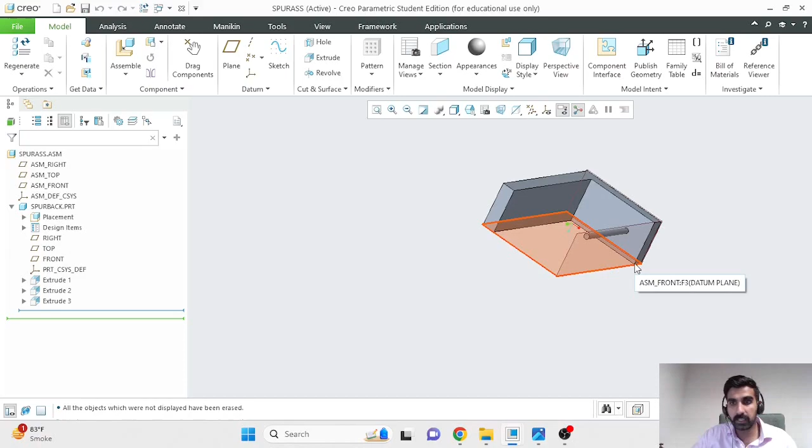This is very similar to what we've done previously for a spur gear train, but a spur gear transmits power across parallel shafts, and bevel gears can be used to transmit power across perpendicular shafts normally, even though there are specialized bevel gears that can transmit power across intersecting shafts at 45 degrees or 120 degrees, or even non-intersecting shafts. But we are focused on the standard case where we will have two bevel gears transmitting power across 90 degrees.

You are welcome to design your bevel gear yourself. You'll use standard operations whereby first you'll make a cone, because the base of a bevel gear is a cone, whereas the base of a spur gear or a helical gear is a cylinder. Make a cone, then remove material from it to make your involute profile, and once you have a tooth you can pattern it axially about the center of the gear, and you'll have your bevel gear.

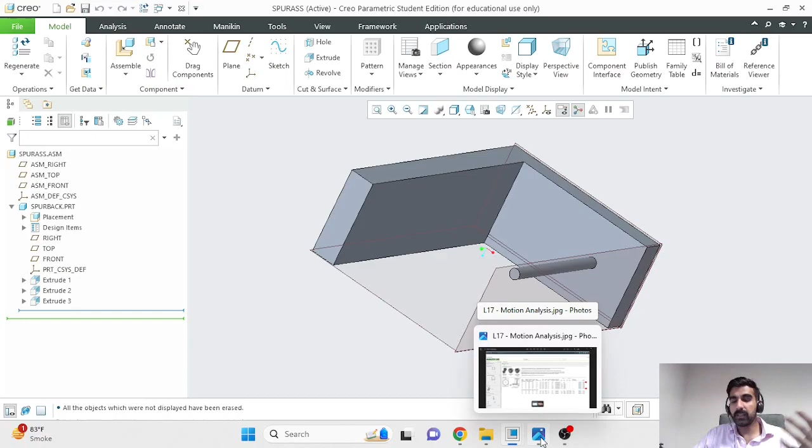But what I'll do is use standard bevel gears which have been made by manufacturers, sold on McMaster-Carr. We've talked about McMaster-Carr, it's an online hardware store, and I'm sure you can get to this page. If you can't, there's the link over here. I will be choosing this bevel gear.

From here, and I'll try to mate them together like such, and then on actuating the first gear, the second gear should move perpendicularly. A few important parameters of this gear: like with spur gears, two mating gears should have the same gear pitch and the same pressure angle.

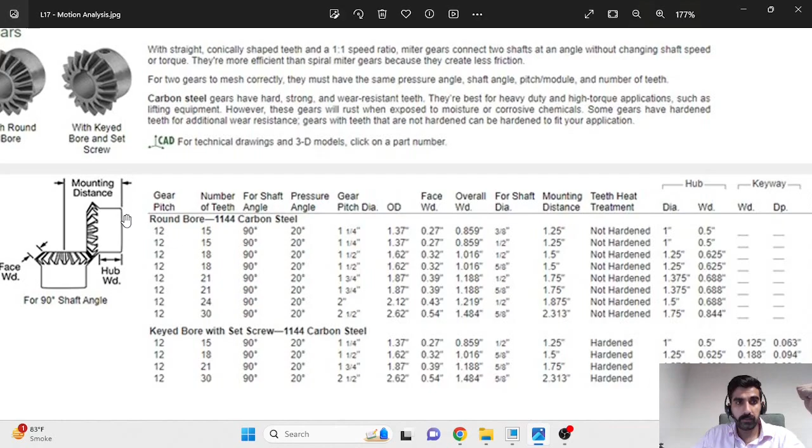In my case it doesn't really matter, because for the sake of example I'm going to use the same bevel gear twice. So all I'm doing is changing the direction of motion, not changing the speed of the outlet relative to the inlet. But if you are using gears of two different sizes, make sure the gear pitch and the pressure angle are the same. Right now they are the same because I've applied this filter over here, where only those gears with the gear pitch of 12 are being shown.

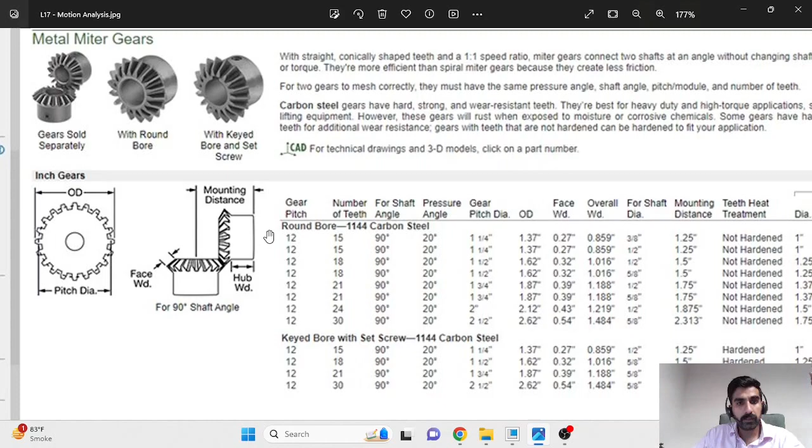And the second parameter that is of importance to us is this mounting distance. So for each bevel gear, if you draw a cone along its teeth, it will intersect at a point along its axis, and that will determine its mounting distance.

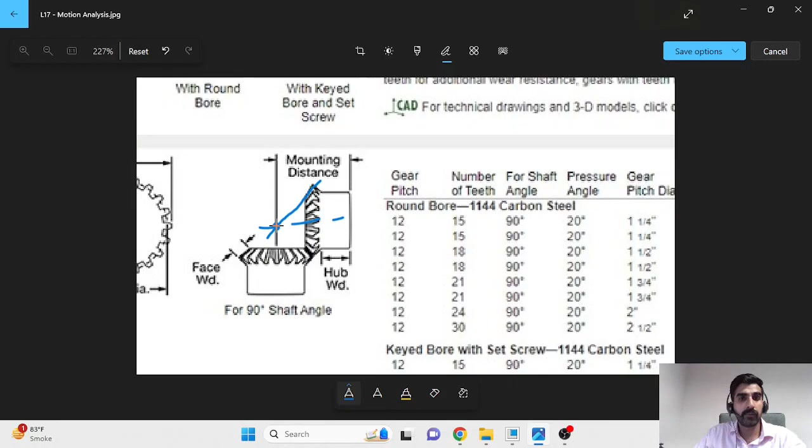I was hoping I'll be able to draw over here. This is more complicated than I thought, but might still work. If you draw a line along its tooth, through its tooth, and see where it intersects its central axis, that is the point where your two bevel gears would meet, where the respective apex angle of the bevel cones for both gears would intersect.

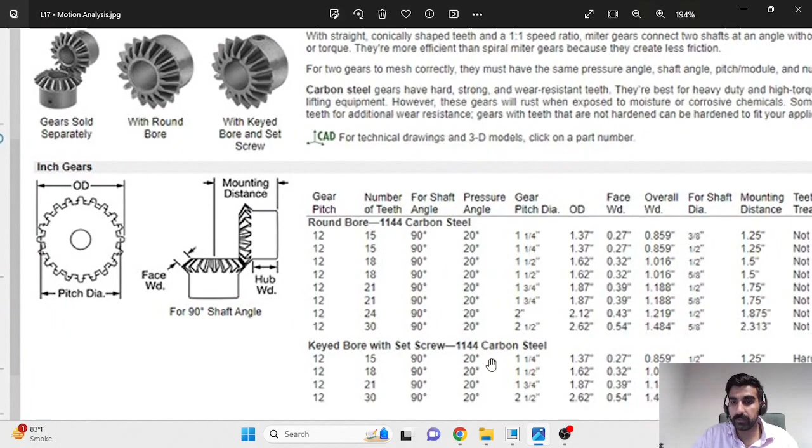But for us, this has been calculated as the mounting distance. So the mounting distance for our gear that we are using is reported over here as 1.25 inches. So that's the distance from the back of the hub, in this case, to the cone apex point, and the two bevel gears should have the same.

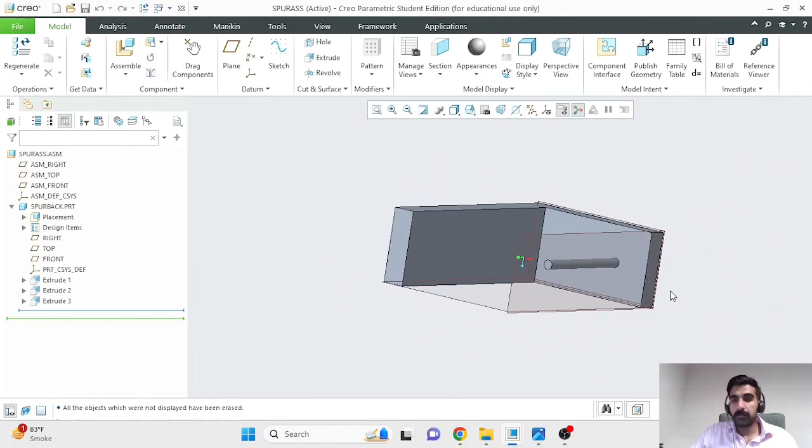They don't have to have the same mounting distance, but if the two bevel gears are identical, then they'll have the same mounting distance. So I'll use this back plate, this base assembly to mount my bevel gear.

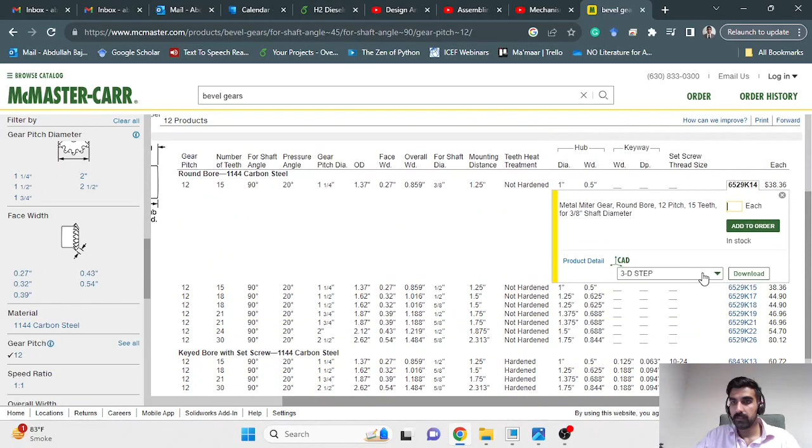So I have downloaded my bevel gears from McMaster-Carr by selecting the gear that I want. Let's say I want this gear, and then select a 3D step file. That's a 3D format. Unfortunately, Creo's part format is not available over here.

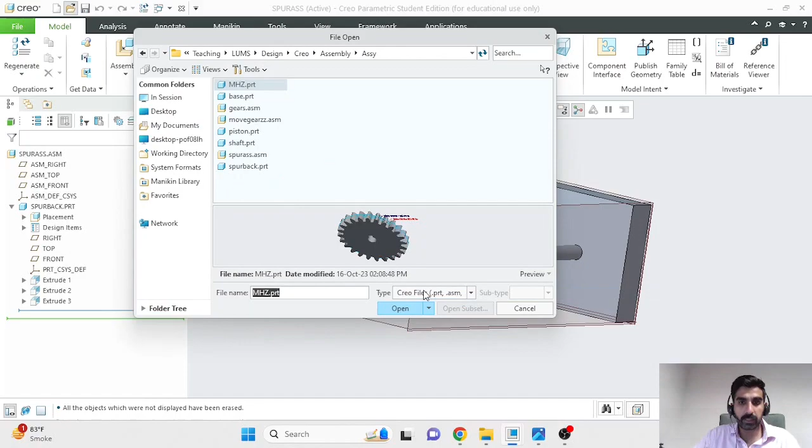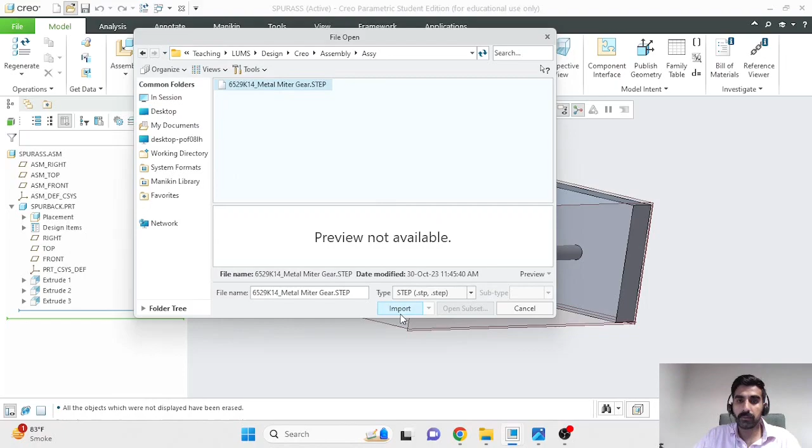Download that, and then we can import that in Creo. So I'll open a new part file, and right now the bevel gear which I've downloaded is not visible because it's a step file. You could either enable all files, or if you want to be selective, you can select step file from here if you can find it. Over here it is, and now it will only show you your step files in your working directory.

I'll import it, and this step converts the step file into a part file, into a .prt file, so that we can work on it in Creo. You can adjust these settings if you want, you can change the name. I'm happy with the default name.

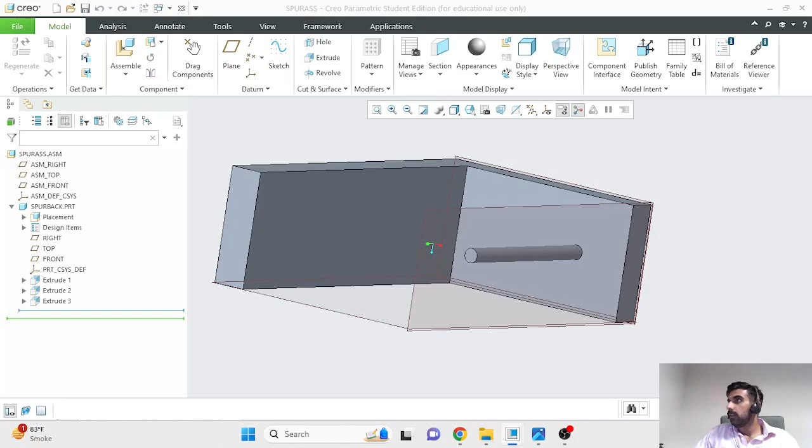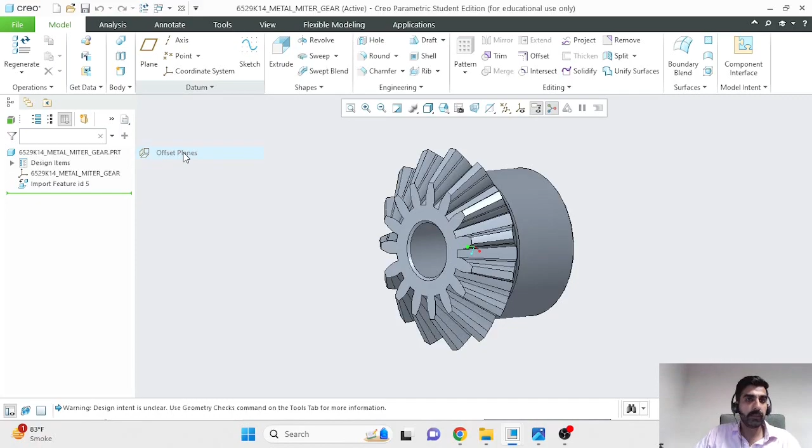And now it has been opened in Creo as a part file. You'll notice that you have a coordinate system, but you don't have datum planes, and most likely you will need them later. So a very simple way of adding principal datum planes to imported parts in Creo is by going to datum and creating offset planes, offset to the origin of the coordinate system, with x offset 0, y offset 0, z offset 0. It has created three principal planes which are mutually perpendicular and passing through the center of our gear.

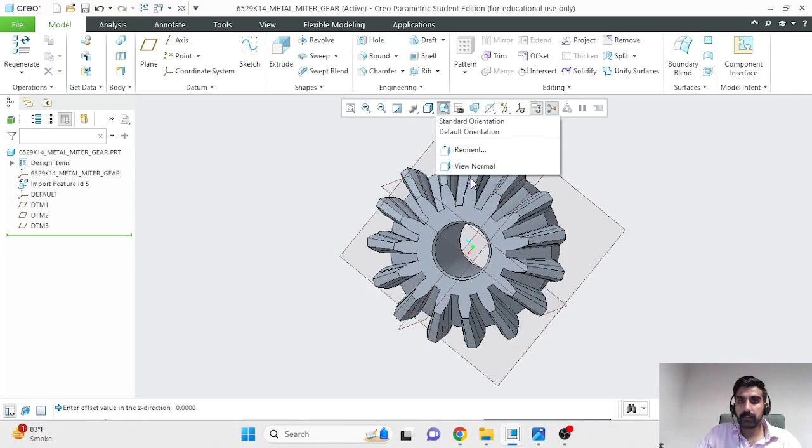We can verify that by looking at it perpendicularly.

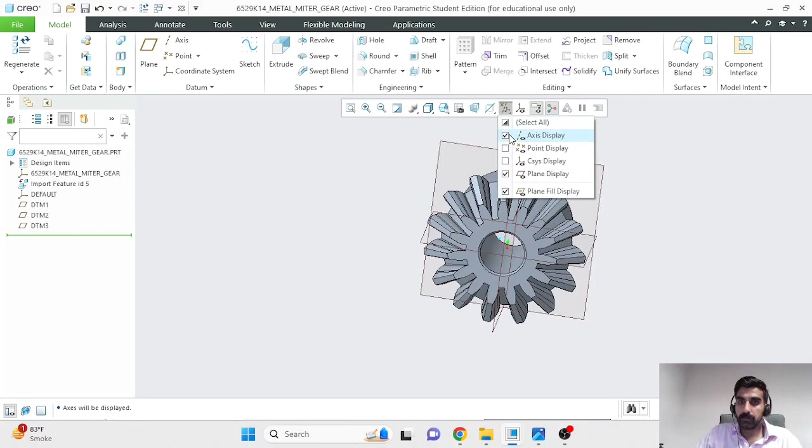Another benefit of doing this is that we can now easily create an axis through the center of this gear. Had we created a cylindrical feature in Creo, an axis would have automatically been generated, but over here we don't have an axis. The axis option is enabled, but nothing is showing up, and we will need to have an axis in order to define pin joints.

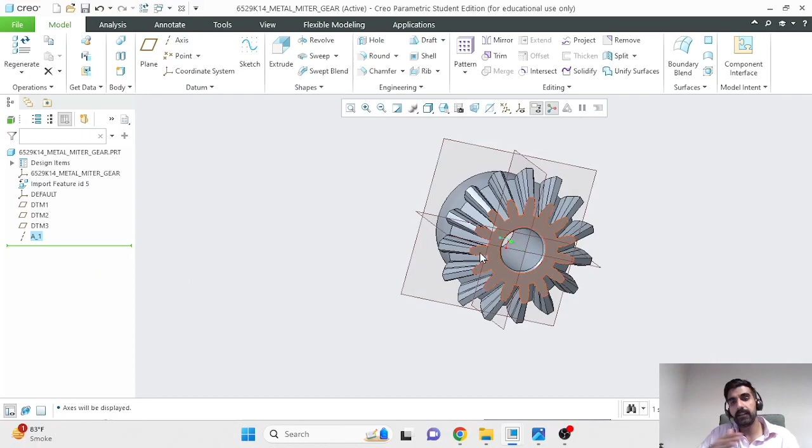So I'll define an axis by selecting two intersecting planes, and an axis would be defined along the line where these two planes are intersecting. So you see a new axis has been created, and that's over here.

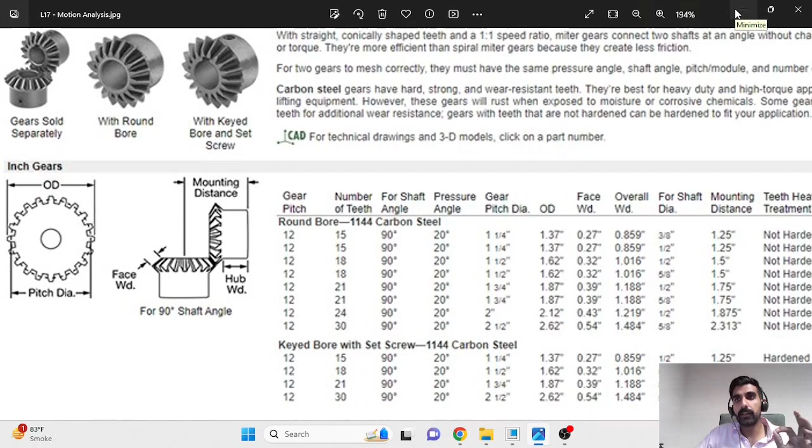Another thing that I'll do is I will define this mounting distance. I'll make a point over here so that I know where the mounting distance is, just for reference. So I'll make a sketch over here.

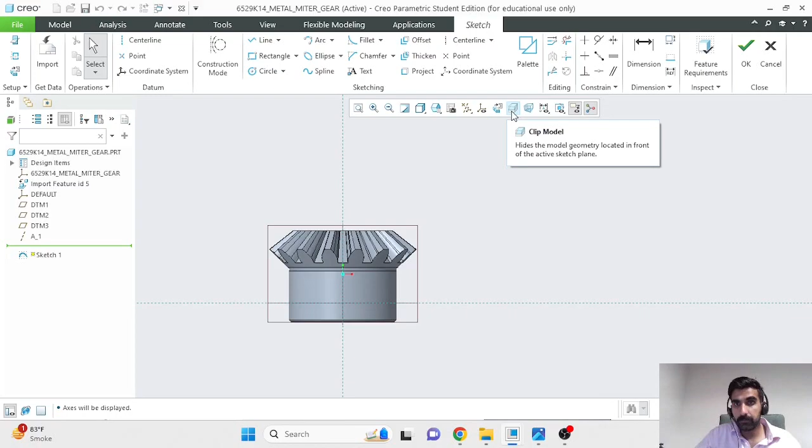I don't know if we've discussed this previously or not. If you're in the sketching view and you are working on a plane which is in between some material, you can clip the material between your eye and that plane by pressing this clip model, and it gives you a cross section in that sketching plane.

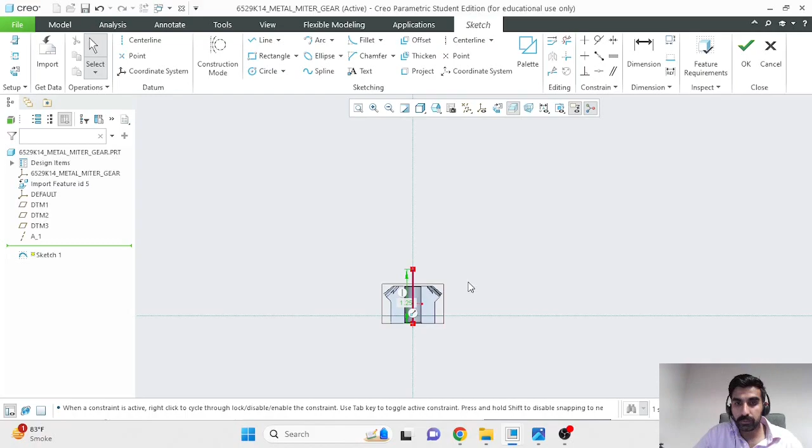What I'll do is just make a simple line starting from the back of the gear ending somewhere over here, and I know that the length of this line, if I want this to be an indicator of the mounting distance, should be 1.25 inches. I'm working in inches, so I'm consistent in terms of units.

Now what I'll do is create a point. Now I'm not in Sketch, I'm in the default model tab, and I'll create a point which is a zero-dimensional datum. Axis is a one-dimensional datum, point is a zero-dimensional datum, and planes are two-dimensional datums.

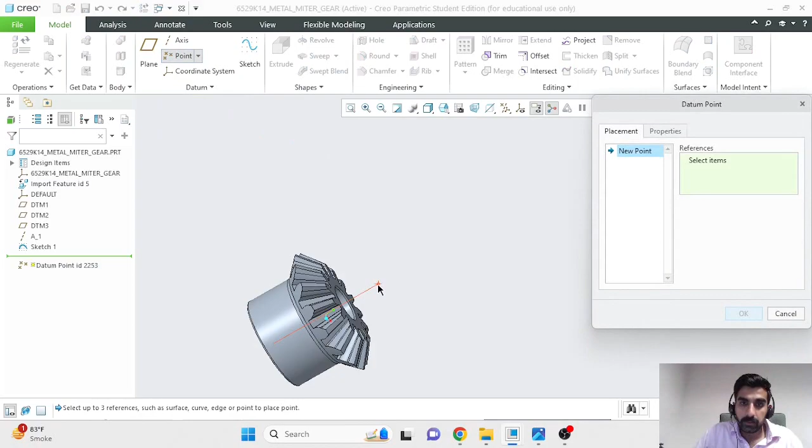So I'll select the edge of this line and create a point over here. I can actually hide the sketch now, I don't really need it, but this point would be a useful reference later. So this point is the apex, the vertex of a cone if it were to be created by extending these teeth.

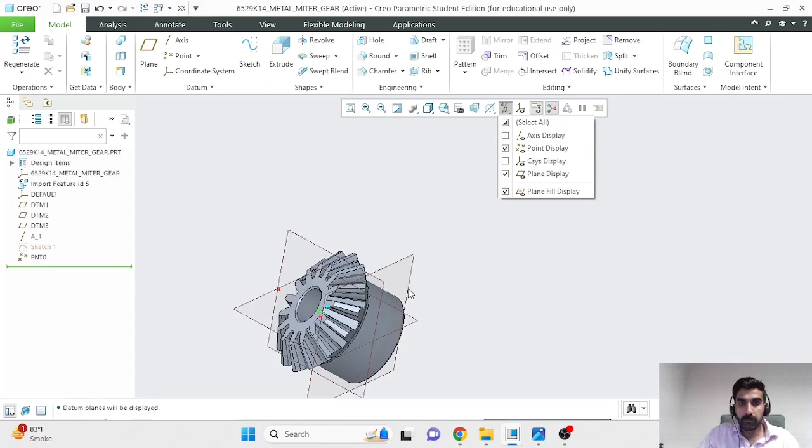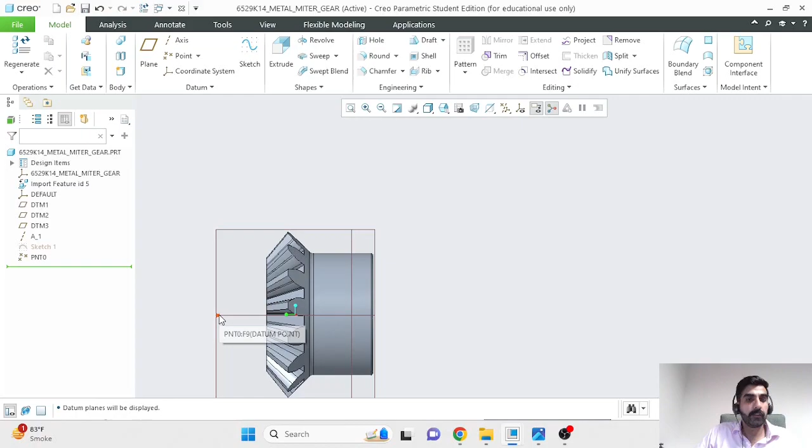So if I look at it, normally this will become obvious. If I look at things perpendicular to this axis, just imagine that you had a line extending through this tooth. Where it would intersect the axis of this gear is this point. So that's the tip of your bevel cone.

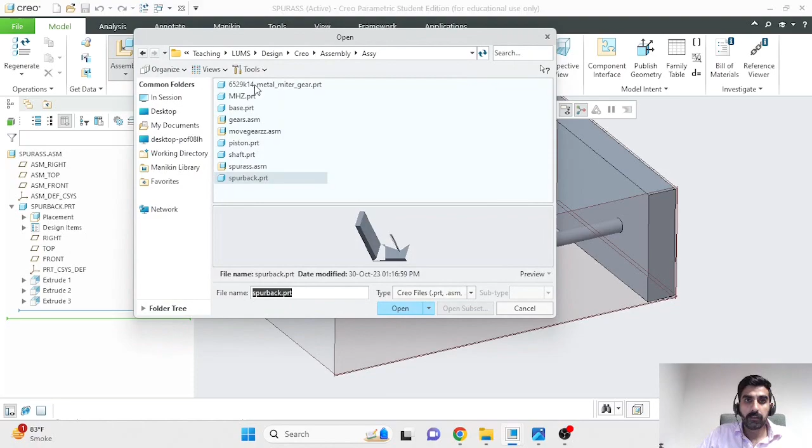I'm happy with this bevel gear, which was imported as a step file and has been modified in the part file. I'll assemble that over here. This is the bevel gear that I just imported, and I'll define a pin joint from here.

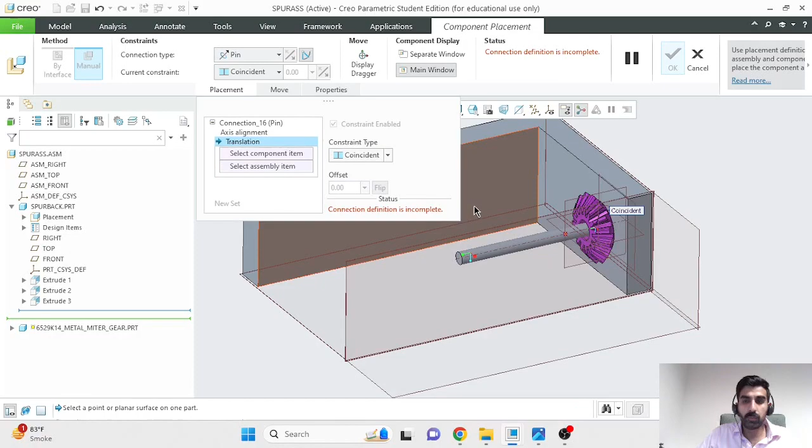Sorry. The first thing that you need to define is the axis. So select this axis and select the axis on the shaft where you want to mount it. And the second thing that you want is a translational constraint.

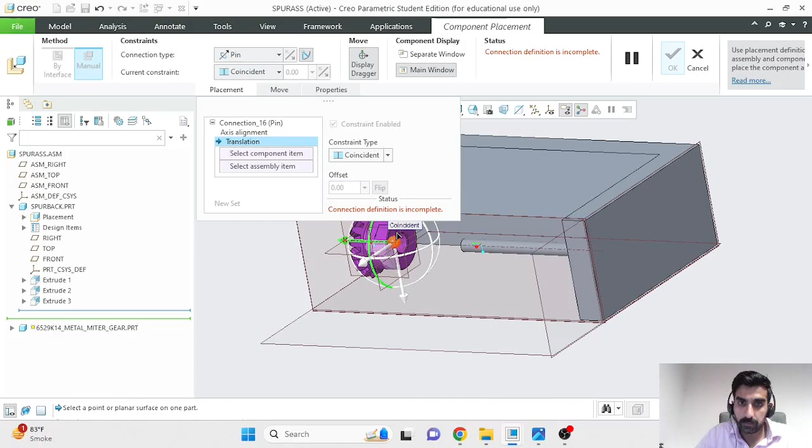So what I'll do is select this surface and this surface, and I'll make them coincident for now. It's not realistic, but for the purposes of our demonstration, that's good enough.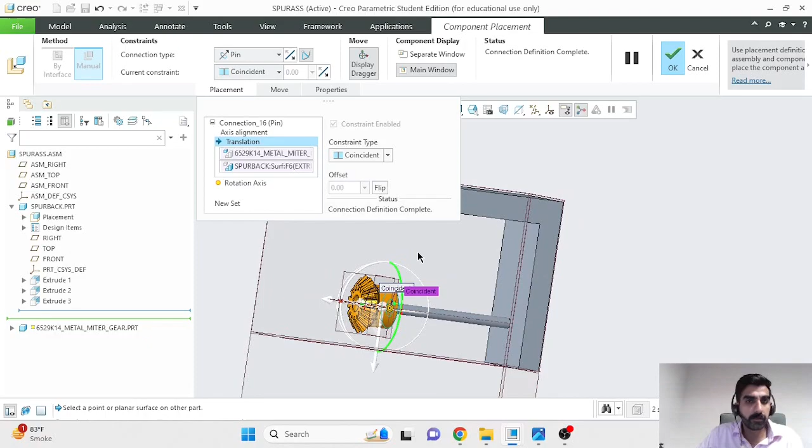So that's our first bevel gear. We can verify that it's a pin connection because it rotates and doesn't translate.

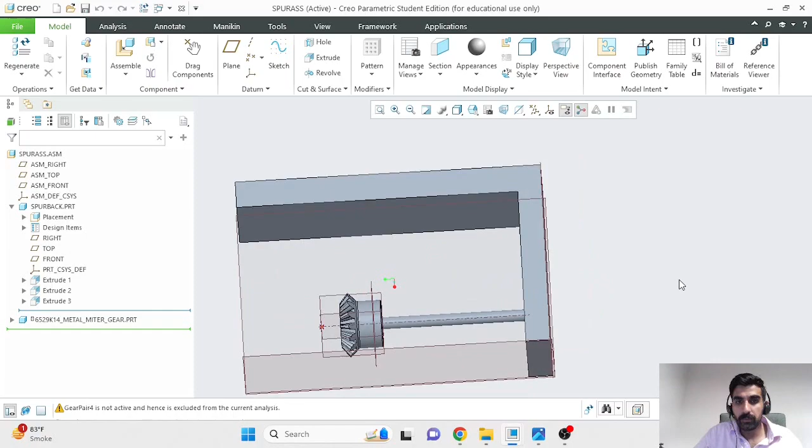Now we have to add the second bevel gear. Before we add it, we need an axis, a shaft on which to mount it. Let's think about where the shaft would be. The first thing we know is that the shaft has to be on the same plane as this first shaft.

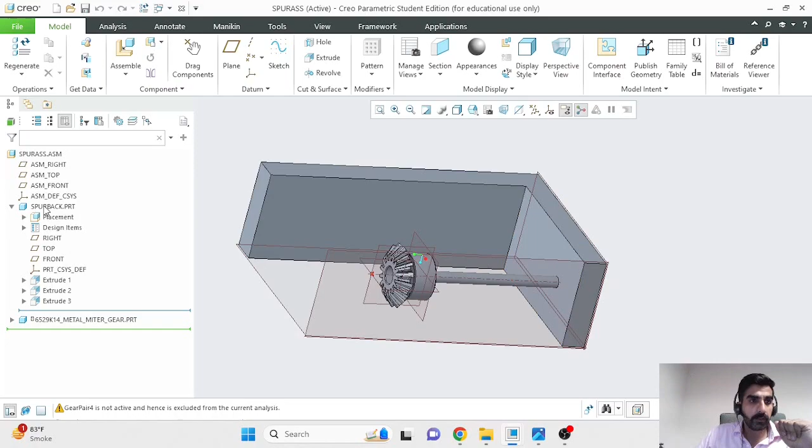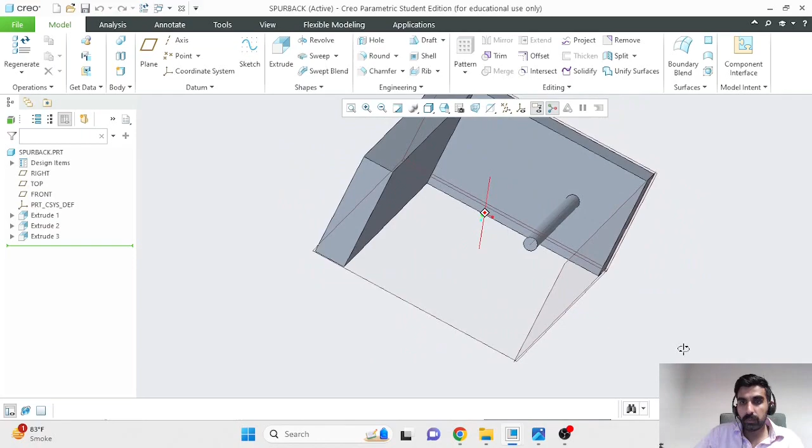So for that, let's create a new plane. You can either work on your base part within this assembly by activating it, or what I prefer, to keep things less crowded, is to open that file in its own window and work on it there. What I want is a plane parallel to this plane and intersecting this axis.

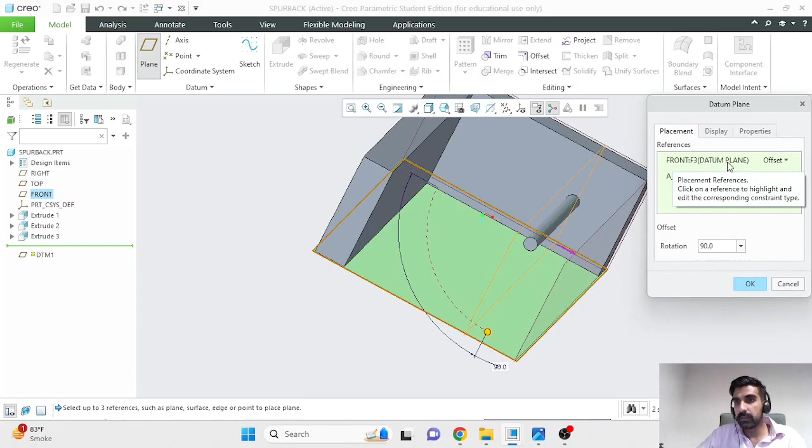I selected these two things while holding control, and I'll make a new plane by pressing the plane button, and I'll have to prescribe a few things. I want the new plane to not be at an offset from the reference plane, I want it parallel to the reference plane. The second reference I provided was the axis, and I want the new plane to pass through it. So that's good. After fixing these two properties, I click OK, and this new plane has been created.

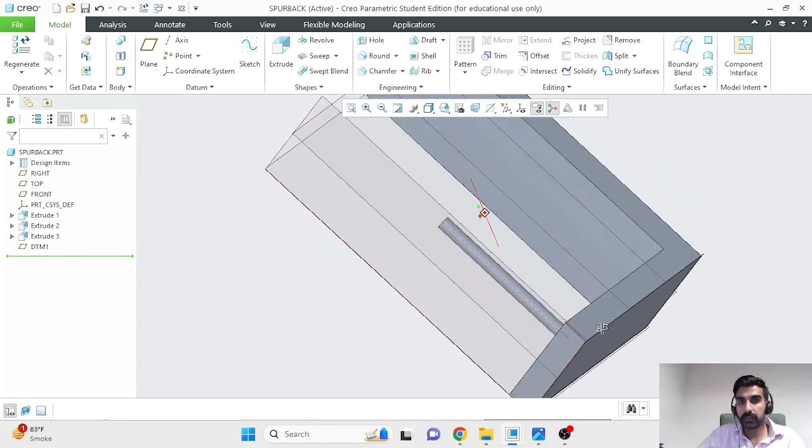As we've discussed previously, you can modify how big or small you want this icon, this representation of your plane, to be. This is more intuitive for me, because if I look at this plane, I'll know right away it's one I made in reference to this shaft.

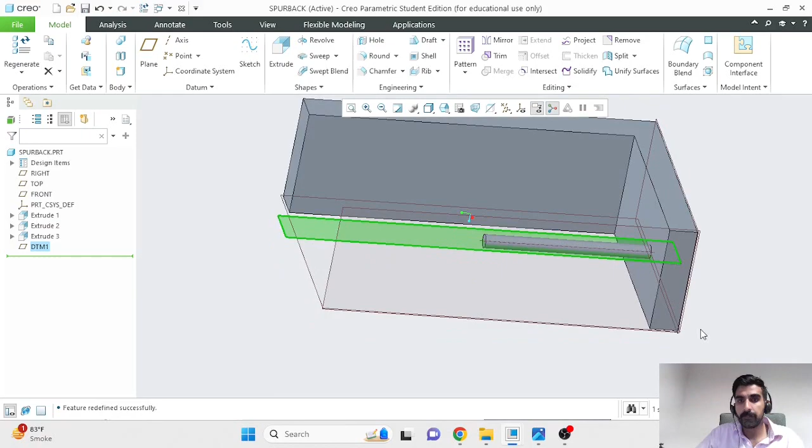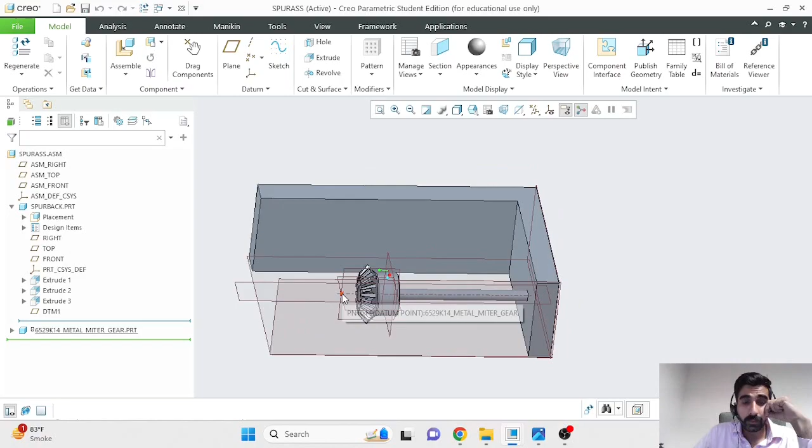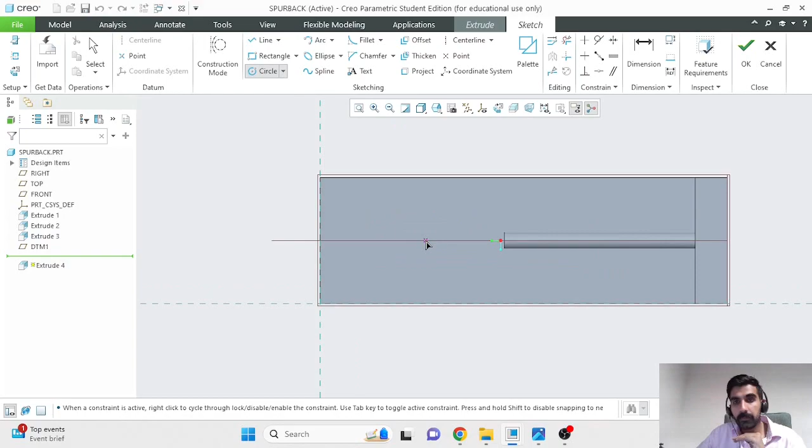So now going back to our assembly, we have this plane. The next shaft I create has to be in this plane, and it has to pass through this point. Let's go back to our base part and make a shaft here by performing an extrude operation. That shaft has to be centered along this axis, and it has to be on this plane.

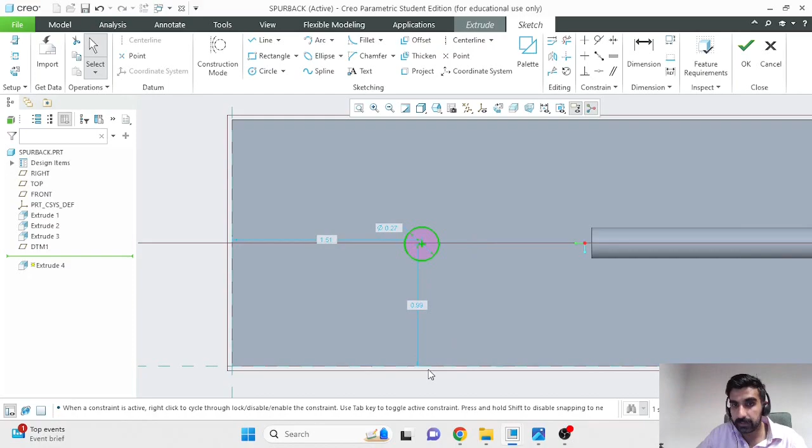I'll make a circle over here. I don't know why it's not snapping. Hopefully in your case it is, but for me, I know the distance between this plane and the base is 1. So I'll manually confirm that, but it should have snapped.

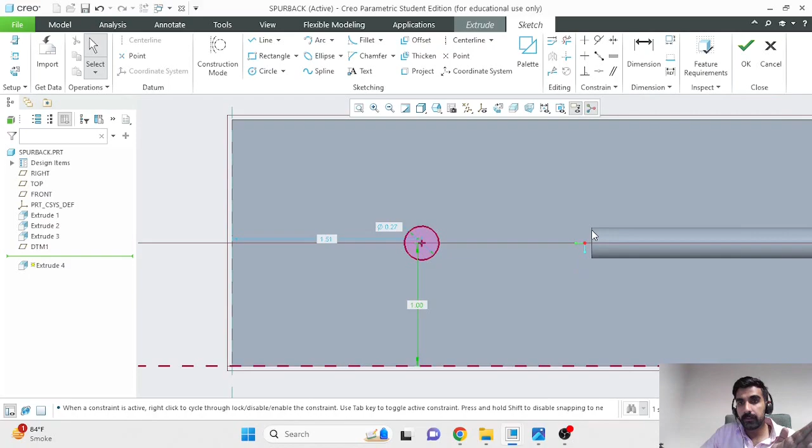The second thing we know is that the mounting distance for our case is 1.25, and the back side of the hub is coincident with this surface of the shaft. So I'll confirm that this distance is 1.25, and then make a shaft on which I can mount my second bevel gear.

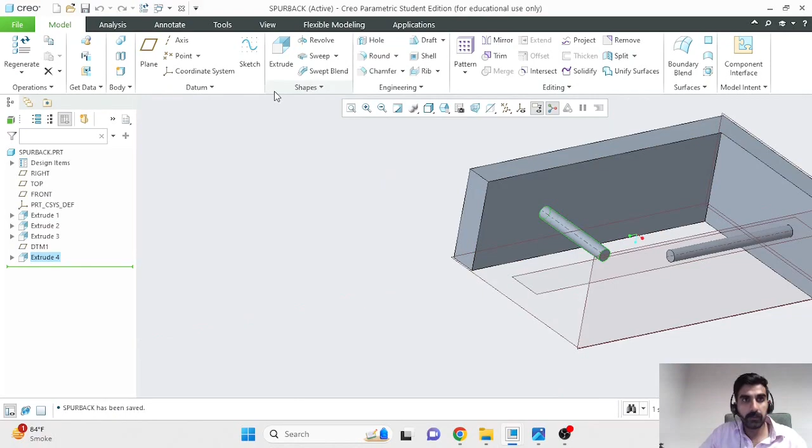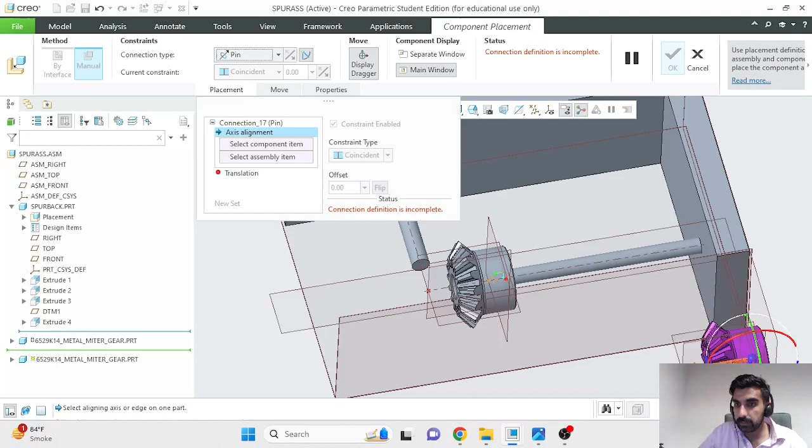Hopefully, once we implement the assembly operations, it will become clear why I did what I did. Let's import the same bevel gear again, and we are again defining a pin joint. We can bring the gear a bit closer.

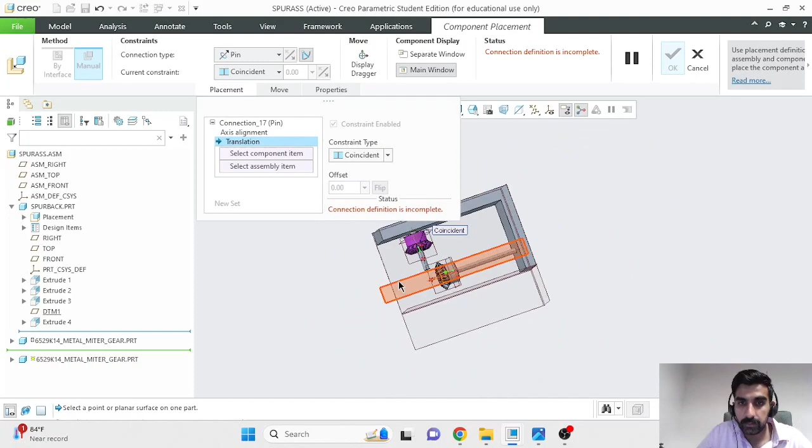The first thing we need to define is the axis of the pin joint. We do that, and then the next thing we need to define is a translational constraint which aligns our gears together.

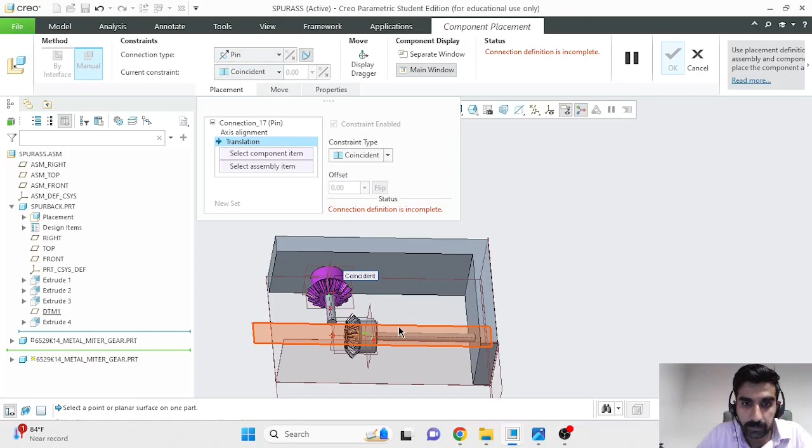So for that, I'll select this plane, and I'll select the back of my bevel gear, back of the hub, and I'll define a distance, and that distance would be equal to the mounting distance, which is 1.25.

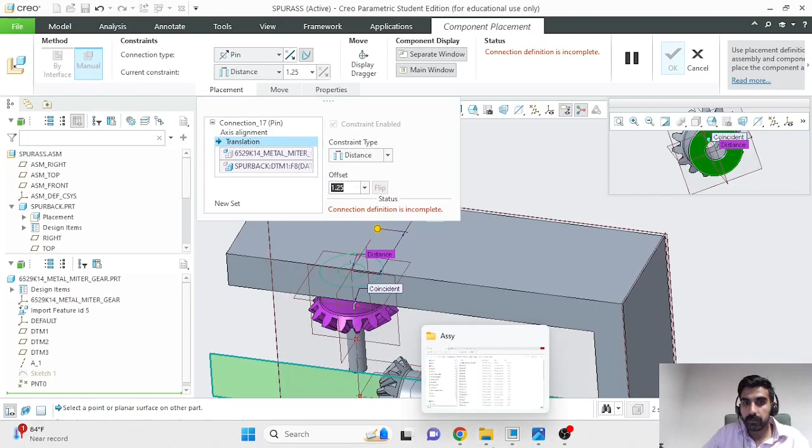I think that was not implemented for some reason. Let me delete this constraint and redefine it.

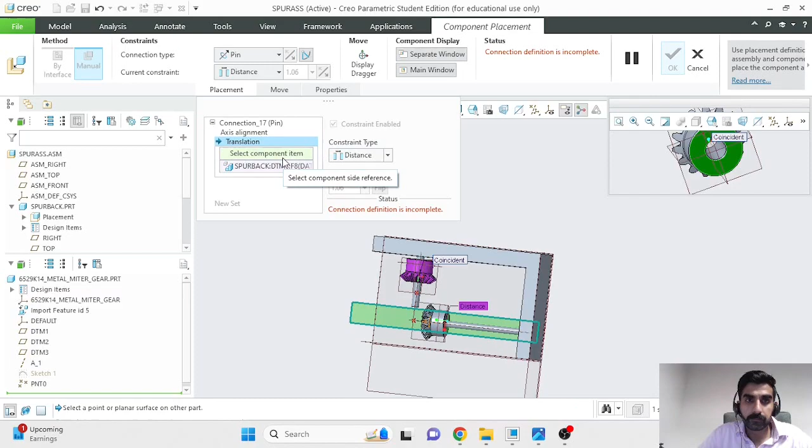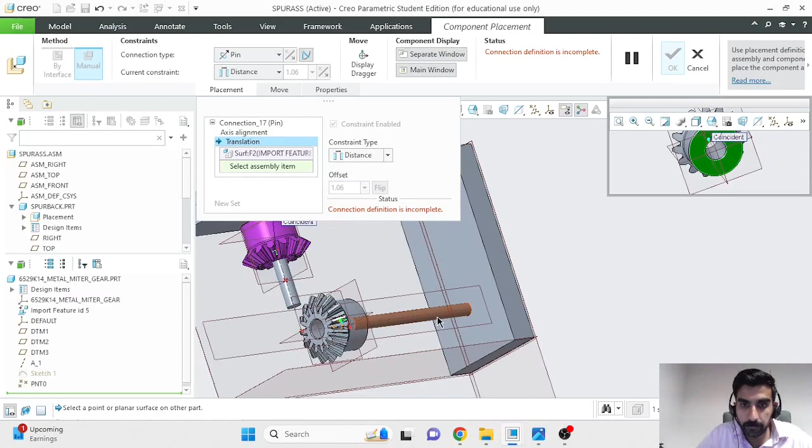So the part of the component that I want is this, and I want it to be at a particular distance from a plane over here, and that plane doesn't exist. So that's why this is being problematic.

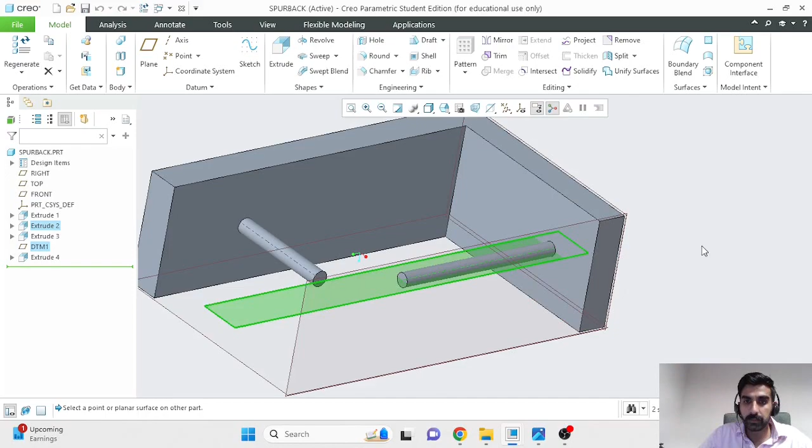So what I want is a perpendicular plane to this, passing through the center of the shaft. Let's go back to our base part, and I'll make a plane which passes through this axis and is perpendicular to this plane. I've selected this axis, selected this plane, holding down control. Let's make a new plane, and yeah, that's what I want.

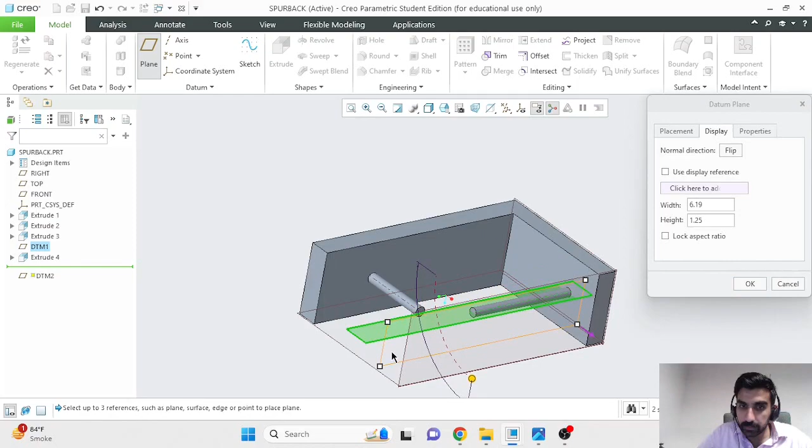I want it to pass through the axis, and I want it to be offset angularly at an angle of 90 degrees. And I'll decrease its display size. Now I have this plane, and you'll see what I'm trying to do is have the offset distance between this plane and the back of the second hub be 1.25, the mounting distance.

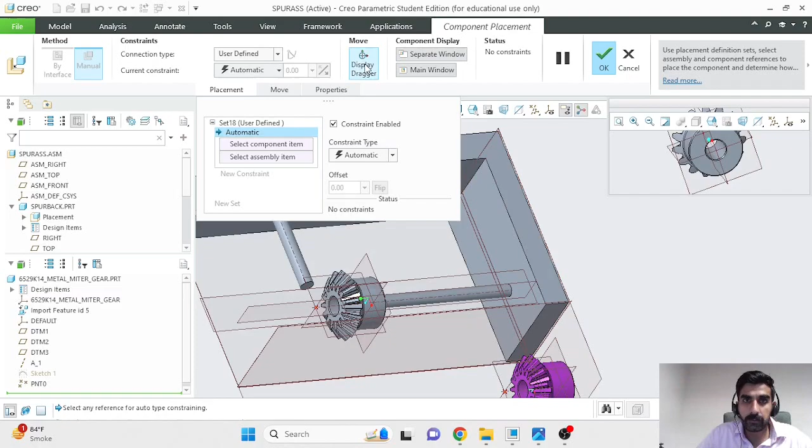So let's quickly repeat some of the steps we just started. We are defining a pin joint.

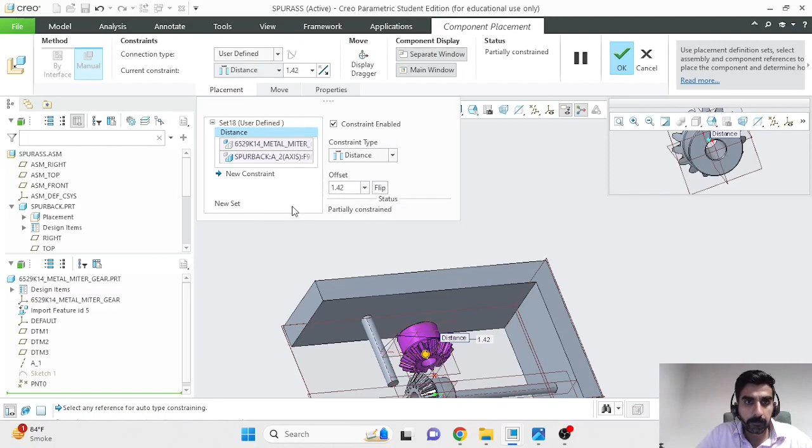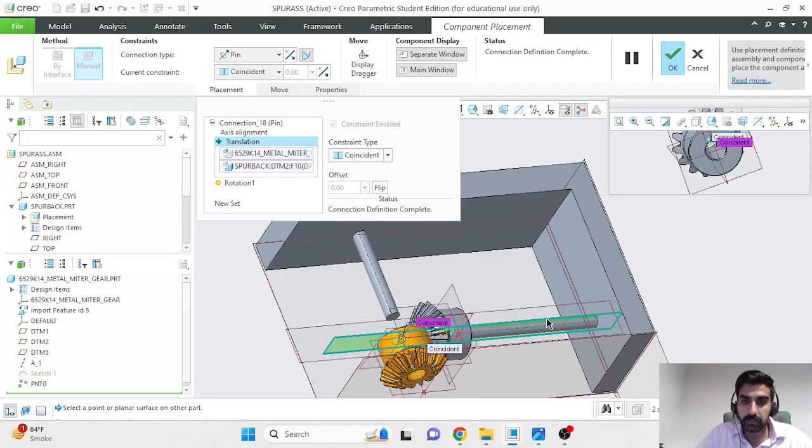Let's bring our gear a bit closer, orient it generally in the right orientation, define the axis of rotation. Okay, I did not specify that I want a pin joint. Define the axis of rotation, and then define the translational constraint from the back of the gear to this plane that we just created, and we want it not to be coincident but at a distance of 1.25. So opposite of that, so minus 1.25.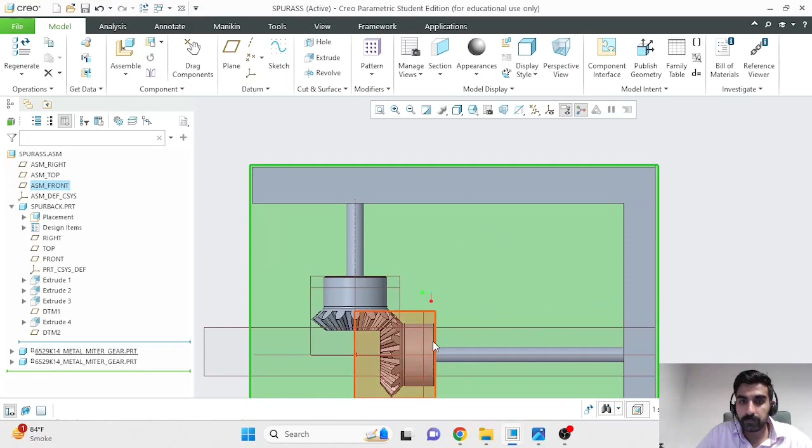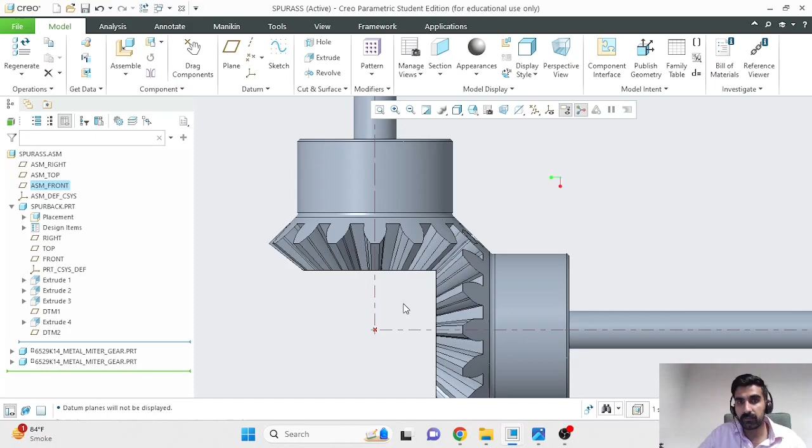And now if you look at things perpendicularly, and I'll get rid of the planes over here, you'll see that the 2 points that we created, it might look like 1 point, but there are 2 points, one for each gear. They are coincident. We do not use that point to assemble our things, but we are using that as confirmation that we use the correct mounting distance. And what we'll do now is that we'll set the starting point position of our gears before we define a gear connection.

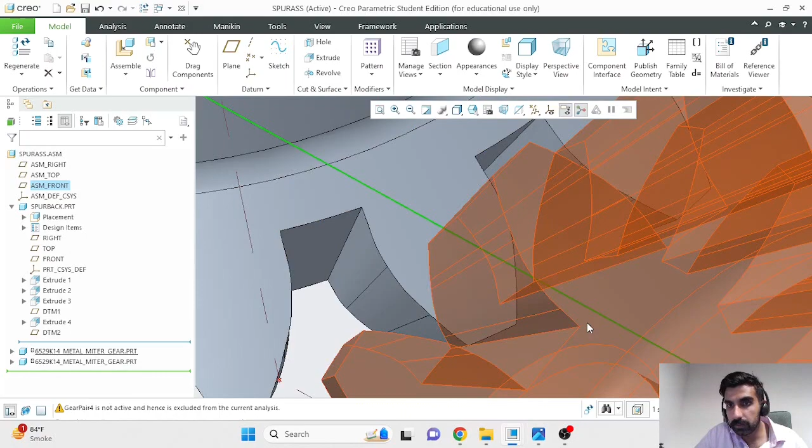This generally looks reasonable to me. You can always try to do slightly better, and you can check for interference as we've discussed previously. But this generally looks like the kind of gear assembly that we'll need, where you have two bevel gears with intersecting axes, and they should be able to transmit power perpendicularly.

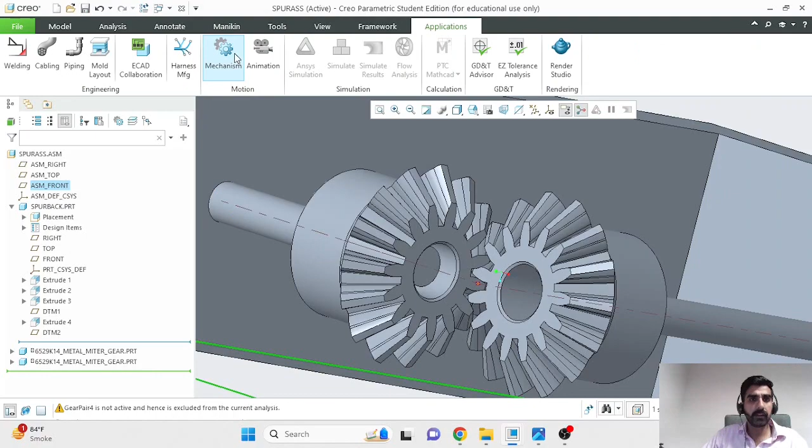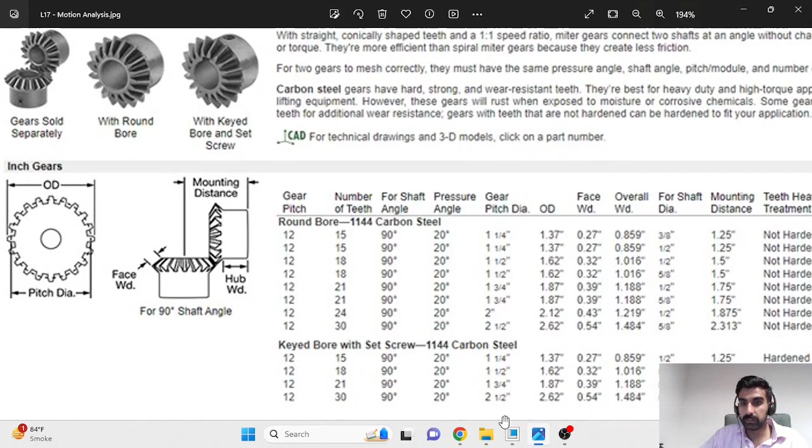Now, similar to how we defined a spur gear connection, we'll go to mechanism, and we will define a gear connection from here. We'll select bevel gear. The pitch diameter for our gear is 1.25 inches. You can get that from the data sheet on McMaster-Carr, 1.25. I'll specify that. First we'll define our first gear using its axis. Here this is our first gear. The pitch diameter is 1.25.

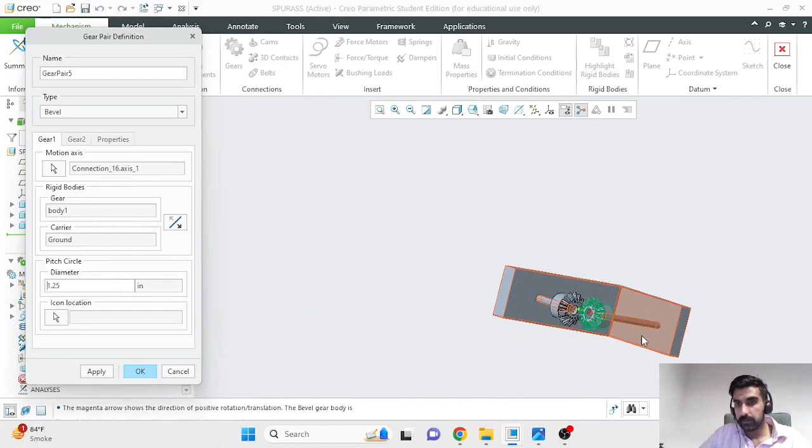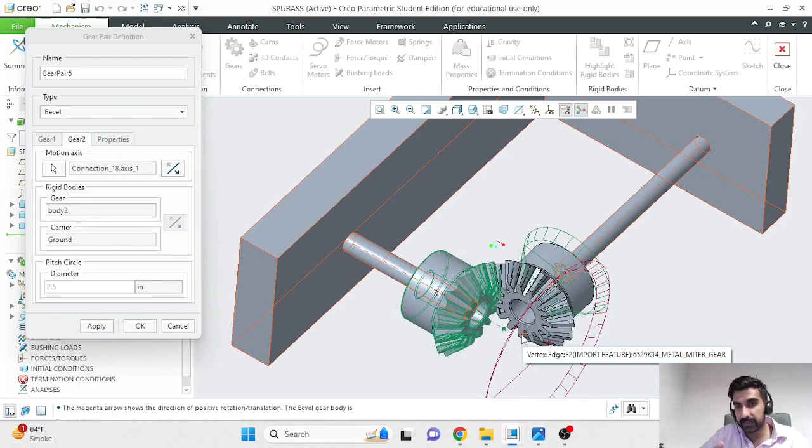Next we'll define our second gear using its axis, and we'll verify that it is connected in the right arrangement. Right now it's not, because if you look at this icon for your second gear, it has two problems. One, it's too big, and second, it is facing the opposite way. We'll fix the size problem later, but first let's make it oriented in the right way. So now when you move it clockwise, this will move counterclockwise as it should.

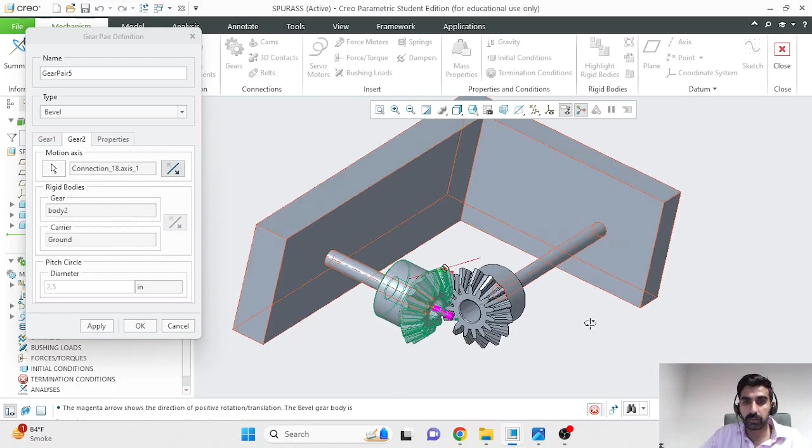So Creo automatically calculates the pitch diameter, and it's incorrectly calculating the pitch diameter of this gear as 2.5. You can fix that by moving the location of your first gear as Creo understands it. So right now, for whatever reason, Creo thinks that your first gear is over here where you see this green icon. You can change its location by selecting this arrow and selecting a point through the center of this gear.

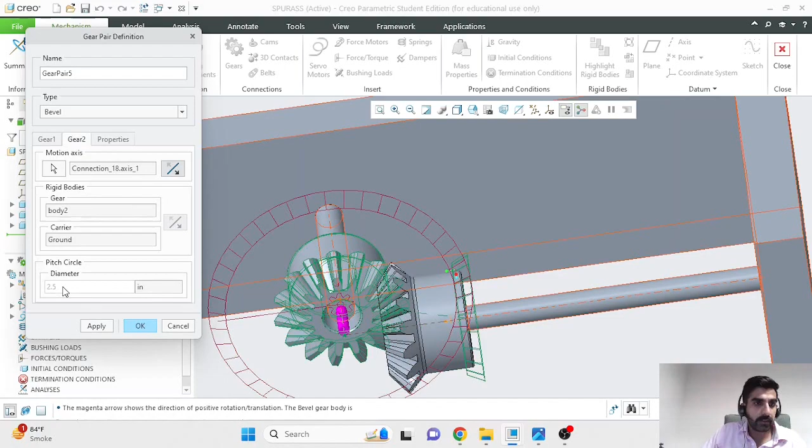And when you do that, you'll see that the pitch diameter over here should be 1.25 as well, but that's a lot of work. An easier way to get around that is not to ask Creo to determine the pitch circle diameters, define it manually. The pitch circle diameter of gear 1 is 1.25, and so is it for the second gear.

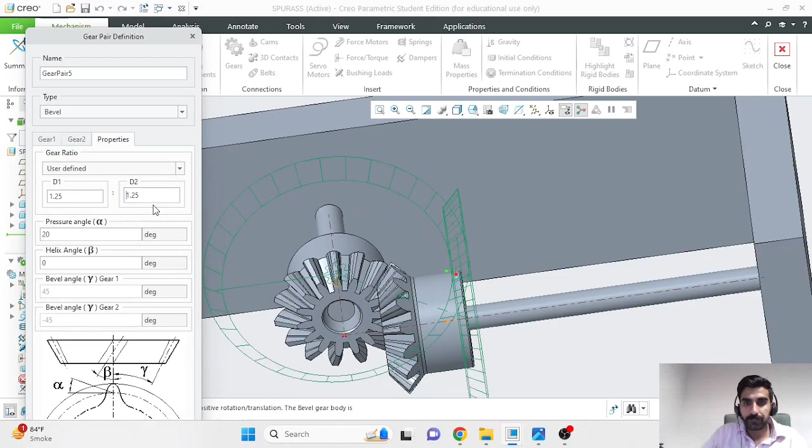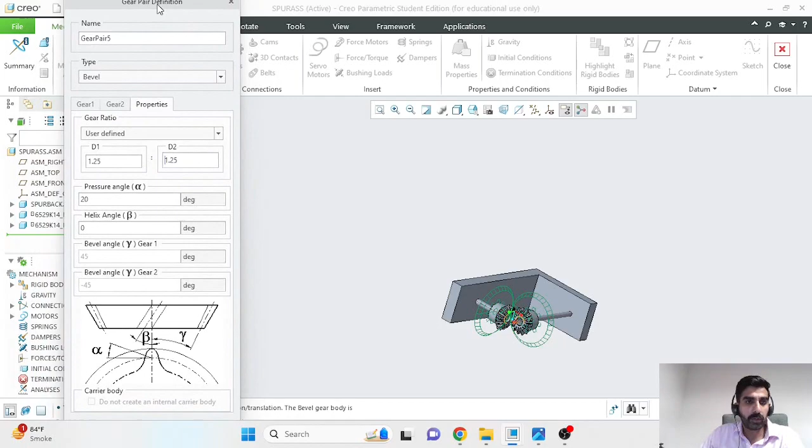And once we have done that, we have to verify that our pressure angle is correct. For our case, it is. I know it from the specifications on McMaster-Carr, but you should verify that. We don't have any helical angle. It's a straight bevel gear, so that's correct. And the other properties are calculated for us. Then I'll click OK, and we have established a bevel gear connection.

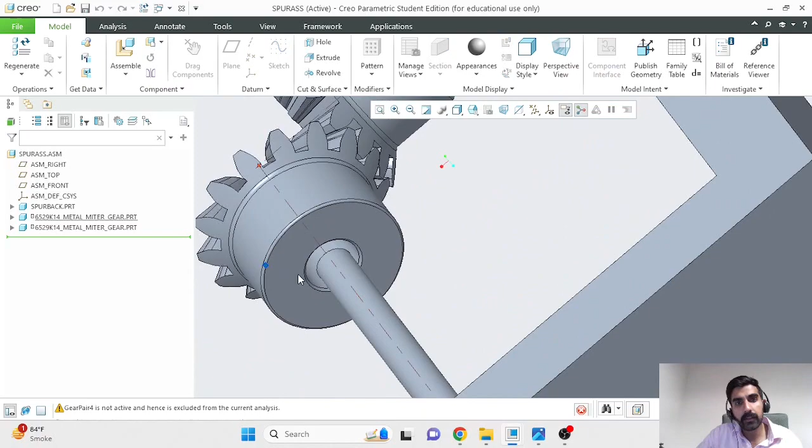You can close the mechanism application, and now when we move our first gear, the second gear moves with it, and our mating is consistent, and this depends on where you set your first tooth to mate. In this way, you can make a bevel gear assembly, and motion which might have been transmitted to this shaft, for example, through a spur gear, is now being transmitted downstream at a 90-degree angle.